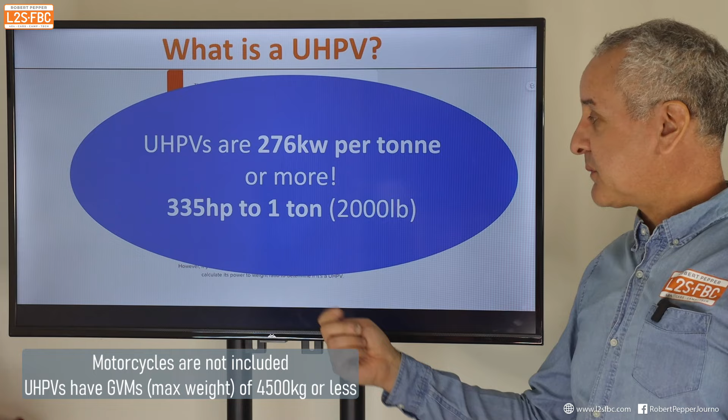All right, so let's look at what a UHPV actually is. What kind of cars does it apply to? Well, ultra high performance vehicles, essentially it's anything with more than 276 kilowatts per tonne power to weight, or 335 horsepower to 1 tonne, translated into imperial there. That's all it is. Now, here's an example, the 458, I've done the maths there, so that clearly is a UHPV. The 488, a newer version successor, again, that is definitely UHPV.

Huracan, same thing again. But what evidence is there that these are actually the most dangerous cars? So yes, I understand you've got to draw the line somewhere, and it's really hard to write regulation. But if I said to all the car enthusiasts, what vehicle is most likely to spin out of control into bystanders? The answer would be the Ford Mustang. And no offense to Mustang drivers, but if you go to YouTube and search for Mustang fails, there is evidence, right? Now that is well underneath that threshold, but it is a powerful rear drive car.

So I think if you're going to look at risk mitigation, that's the sort of thing that you need to look at. And even the humble GR86, less than half, you switch the stability control off on that, and you've got a tail-happy sports car with a powerful Torsen LSD in the rear that will easily swap ends on you. Anyway, Porsche 911 GT3 actually is not an ultra high performance vehicle because it just sneaks underneath the power to weight ratio, whereas the Turbo S is above the power to weight ratio, so it is.

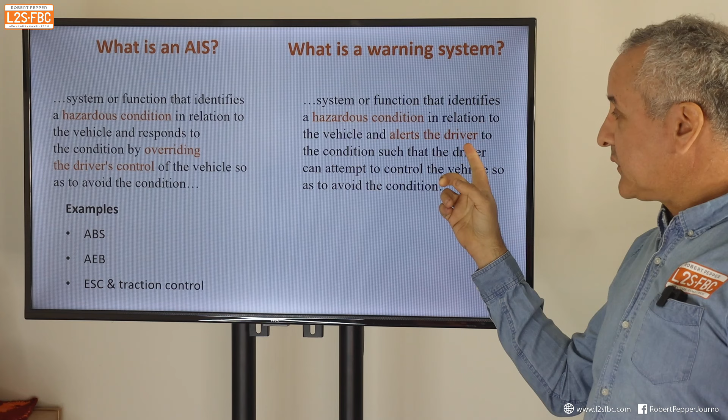Now, it also differentiates in the legislation with a warning system, which is again a system or function that identifies a hazardous condition, but this time it just alerts the driver so that the driver can take some action. And it gives examples here of blind spot detection, forward collision warning, and lane departure warning. Now, there's also lane keep assist, very similar. Lane keep assist will actually move the car back into the lane, warning just tells you.

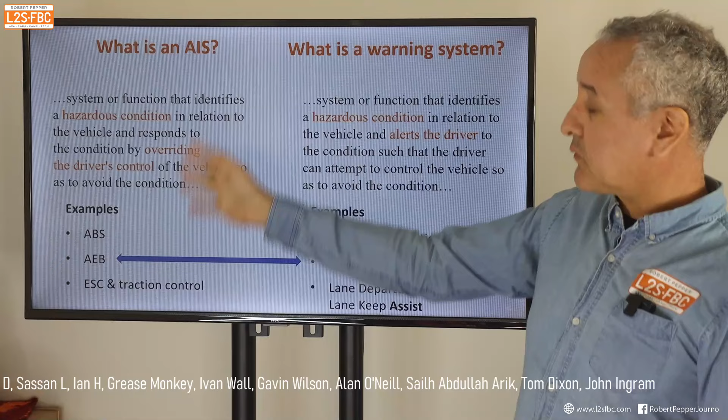And that starts to bring up a grey area here, because AEB actually will warn you before it applies the brakes. So technically that could be a warning system as well as an AIS. And once you start to get into the minutiae of these various electronic systems, which do vary from vehicle to vehicle, different names, it's going to become very difficult for people to figure out what is a warning system which they can disable, like blind spot monitoring, or what is something like AEB which they can't disable in some way. So this needs a bit of work, and it will be confusing for people, I feel.

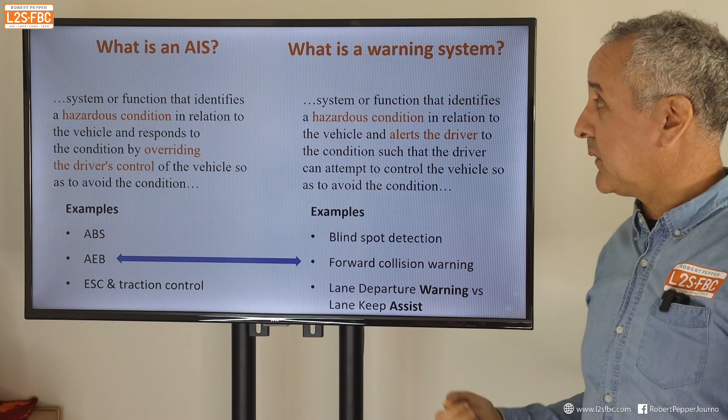Then we come into driving modes. Now, pretty much every car, and indeed every four-wheel drive now, has driving modes to set the vehicle up for different conditions. And in the case of sports cars, typically the suspension might go from hard to soft. The traction control system might be relaxed in some way for the sportier modes. Stability control can go anywhere from fully on, very tight intervention, to completely off, and anywhere in between really.

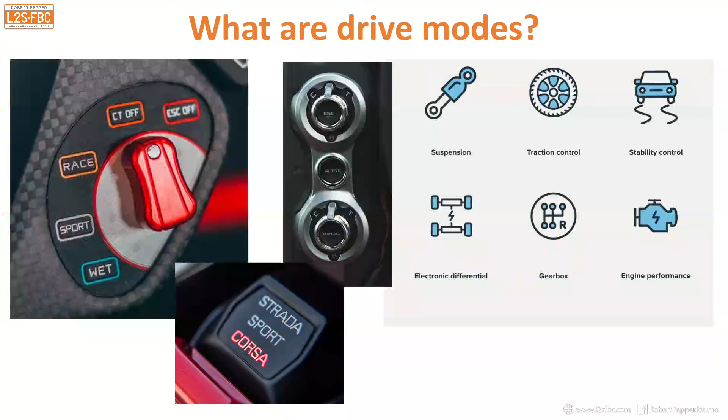Electronic differentials, torque vectoring, that could be the center differential or clutch, or the differential between the wheels on the rear axle. The gearbox, that would be the shift points, etc. Engine performance, maybe there's extra power, but often it's just throttle sensitivity. So all of these things can be mapped to give the car different characteristics. And here you see a Ferrari, there's different modes, that is a McLaren, and that is a Lamborghini, so that's pretty normal.

Effectively, what the legislation is saying is that if you've got all of these AIS systems which are there to keep you safe, if you disable them in any way, that is going to be a fine of 5,000 Australian dollars and 6 demerit points. All right, so let's delve into that in a bit more detail. What is disabled as far as the legislation is concerned?

Well, it's not quite the dictionary definition of the word disabled. Disabled, for the purposes of this legislation, remember we've got to go to the law here, not the dictionary definition, means an automated intervention system, which we've covered, and that is not a warning system, is disabled if it is permanently or temporarily destroyed.

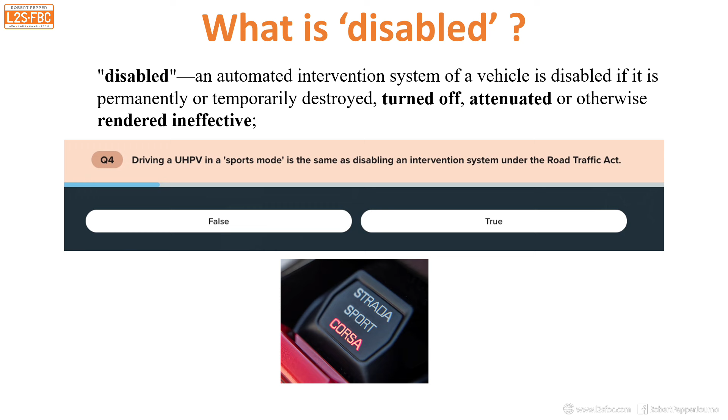Well, we'll take that out. Turned off, yes, so if you switch stability control off, that's off. Attenuated. Now, this is the key word here. Attenuated just means reduced. So this is where they're coming from. It's saying if you reduce stability control or something else like that in any way, shape or form, then that is effectively what they mean by disabled, and that is against the law, and that will land you a fine and your demerit points.

So here's a sample question from the test. Driving a UHPV in a sports mode is the same as disabling an intervention system under the Road Traffic Act. And I said I wasn't going to give you the answers, but the answer to that is yes, it is exactly the same. And so switching your Lamborghini from Strada, which is street mode, to either Sport or Corsa, which is track mode, that will become illegal.

So here's some example modes which you can see for yourself of different manufacturers. They've all got a base street mode. It's saying don't switch out of that, otherwise that would be illegal. Now, here's a question: what about a wet mode? Because some vehicles, you remember, that Ferrari actually had a wet mode, and Porsche has a wet mode as well. And what that does, the Porsches actually detect when the vehicle is in wet conditions and say, hey, would you like to switch to a wet mode?

Now, I don't think that's actually going to be a problem, because it doesn't really disable or attenuate any of the electronic stability or safety systems. It actually probably tightens them up. But that's me looking at this in detail. I do specialise in this area.

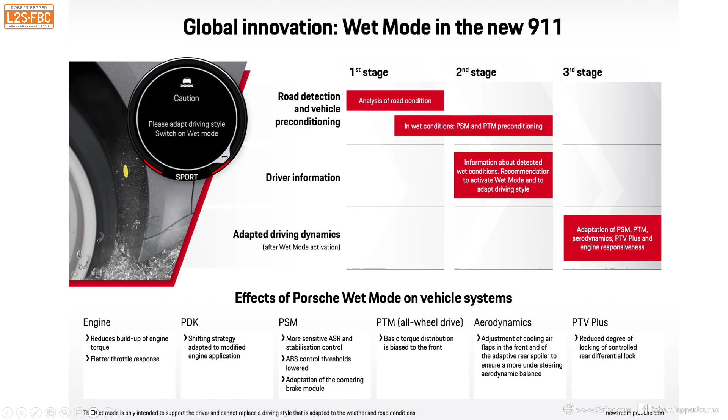So can you ever drive a UHPV with the AIS disabled? Well, yes, there are some examples where you can do that. The first one is if it's not practical for you to drive with the AIS enabled. So let's say, and this is my interpretation here, that you've got a car, it's playing up with the stability control. So you have to drive it with stability control not enabled because it switches itself off to the mechanic to get it fixed. That is my guess as to an exemption from disabling an AIS.

The other example is three parts. The first part is when you did not cause the AIS to be disabled. So let's say you're driving along, your mate leans over, switches off the ESC. Well, that's only one part of it. That's not actually a defence. The second part of it is that you didn't know that was going to be happening. And then the third part of it is that you couldn't ascertain that the car is now in a different mode.

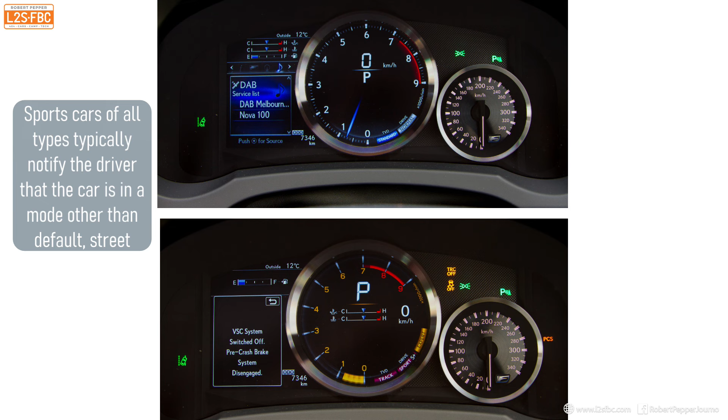And that is where I think people are going to come unhitched, because whenever you switch a car into sports mode, race mode, etc., things change. The gear shift point changes, the exhaust might get louder, and there's always going to be some form of indication on the dash or whatever else to say, hey, you're in sports mode, and some cars even change the whole display as well. So it's probably going to be quite hard to argue you didn't know the car was in some form of sports or race mode.

Now, if you're not sure about whether a car is in a race mode or a sports mode, one good tip is to switch it off, wait a couple of seconds, switch it back on, and typically that will reset everything back to all of the aids on, and then you can drive off from there.

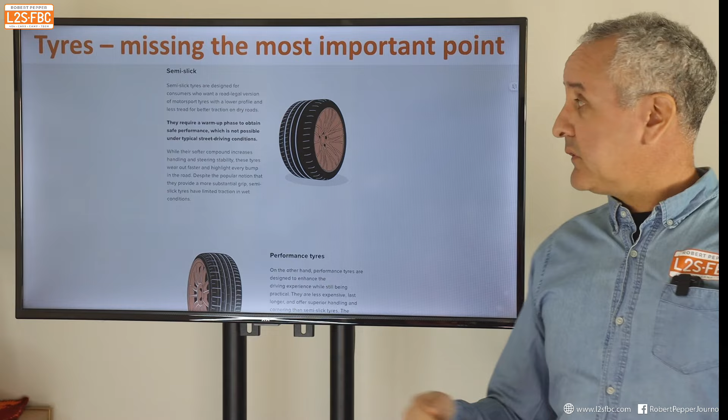Now, tyres. This is a really important point which has been completely missed in the course. They talk about semi-slick tyres and performance tyres, etc., and that's kind of good, but I don't really think that's the most important. The important point is tyre age. You've really got to look after tyre age in supercars. And let me explain why. Because old tyres do not grip, especially in the wet. So here's some examples of what I mean. The problem is that supercars tend to be low mileage, and therefore their tyres will age out, not wear out.

Now, we can argue whether the cut-off age for a tyre is 5 years, 6 years, 7 years, or even 10 years, but I think 12 years is too old, even if you've taken care of the tyres as best as you can. So fundamentally, supercar tyres age out, not wear out. So why is tyre age important? Well, essentially the answer is grip.

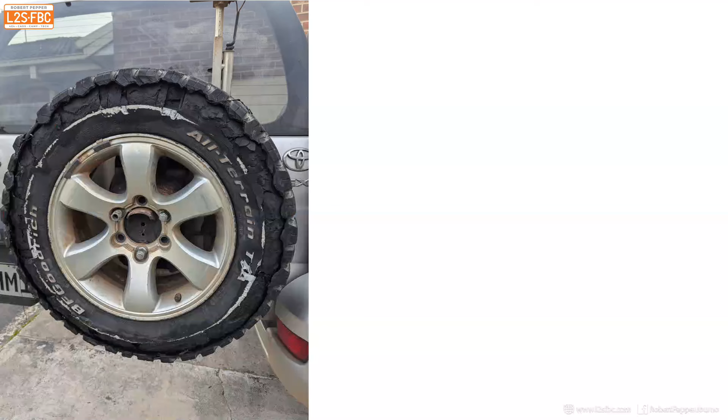Now, tyres grip in two ways. You've got your tread, which is mostly for water dispersion and off-road grip, etc. But also the compound, which is the pliability of it, the silica, the rubber, all the other chemicals which go into it. And that wears out. That hardens over time due to UV exposure, temperature changes, etc. So your tyres do not grip when they're old compared to when they're new.

Right? And remember that old tyres, and this has been borne out by many people, will suddenly lose grip. So if you think, oh, I'll just save it with a bit of oversteer, no. And the AIS won't necessarily help you either, because an AIS cannot rewrite the laws of physics. So if those tyres suddenly snap, they're gone and you with it.

Now, I don't know if that was the direct cause of the accident. I've read reports from motoring writers who have said that that particular corner was easy to take at that speed. But if a 9-year-old tyre suddenly lets go, the best driver in the world, and the guy behind the wheel was an experienced and skillful race driver, has got no chance at all. So that's an example.

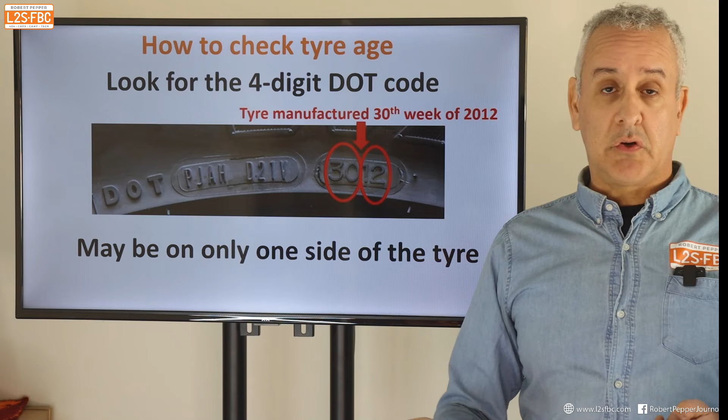Now, how to check your tyre age. I do have a specialist video on this, but briefly look for the DOT code. That's a 4-digit code. Here's an example. There's DOT, that's the manufacturing details. 3012, in this case, that's 30th week of 2012. And it might just be on one side of the tyre. So take a look at your tyre age when you buy a car like this, and also trailers like caravans, etc., because they don't tend to do a lot of mileage, and their tyres can age out, not wear out as well.

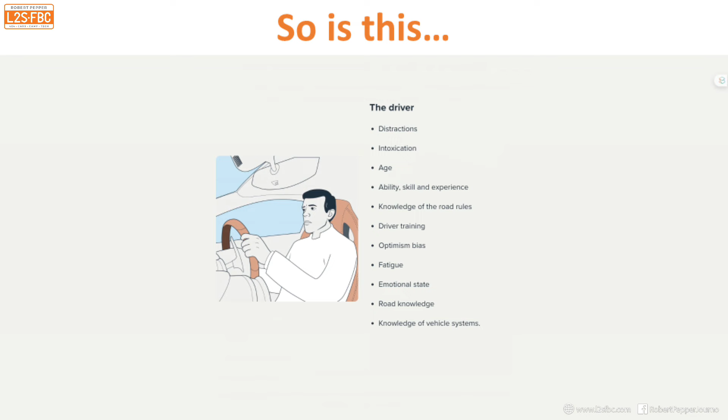Now, there's some good general advice. They talk about environmental factors, which is good. They talk about the vehicle factors, and they talk about the driver factors, and they bring it all together. Talk a bit about dangerous driving, and then here's the environmental, vehicle and driver. So I think all of that is good, and that could just be in a generalised licence.

One point where I do think that they need to clarify a bit further is that they say that UHPVs do not stop quicker. Well, they do. I think if we've got a Camry and we've got a Ferrari 458 with good tyres, you know, at 100 k's an hour, both of them slam the brakes on, the Ferrari's going to stop quicker. Why? Because the tyres are high performance, they're grippier tyres, lower centre of gravity, so many different reasons why that's going to stop quicker.

So to say that isn't the case, I think is misleading, and it starts to destroy credibility. I think you should say something like, yes, the UHPV can stop quicker, but only if it is on a smooth surface and the tyres are good, etc. And in any case, it's not much different, so don't rely on it. So it's a fine line to tread, but I think just to say it doesn't stop quicker is false. They do make the point that the brakes are for repeated application, and that is true, but that's not really, I think, so relevant.

So my suggestions for changing this course: the first one is add tyre age, really important. Second one, talk about tyre performance when cold. I think that should be brought out more. I'd suggest that people should be leaving the suspension on soft, because certainly sometimes even on racetracks you're actually going to get a quicker lap time with the suspension not on the hardest setting, one down, if the racetrack's a bit bumpy, let alone on public roads.

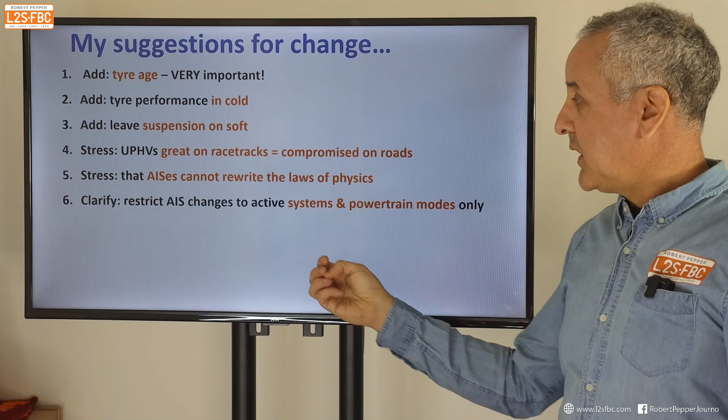And stress that, you know, yeah, UHPVs are great on racetracks, that's what they're designed for, but explain a bit more about why that makes them not so good on public roads. And stress that AISs cannot rewrite the laws of physics. Just because you've put stability control on doesn't mean to say you can go around a corner at whatever speed you like. It simply doesn't work that way. And also say that, look, the AIS changes, they're only talking about powertrain mode. So I think that needs to be clarified a little bit because it will be confusing for people.

And I would also change to allow any driving mode except off. I don't think that there's a reason to be driving a supercar on the road with everything completely switched off. Sports mode, yes, but the only reason you want off is if you want to drift or hang the back out, and that's what you should be doing on a private road.

And I think a really important point here is reduced visibility. So when you are in a sports car, you are down lower, you can't see as much, your view is much more obstructed, you've often got tiny little wing mirrors, the interior mirror is almost non-existent sometimes, so you are much restricted, and that needs to be brought out. I think that's important. And even things like the turning circle being larger as well. You go to do a 3-point turn, you can't because you're surprised, and then traffic is oncoming, so I'd point that out as well.